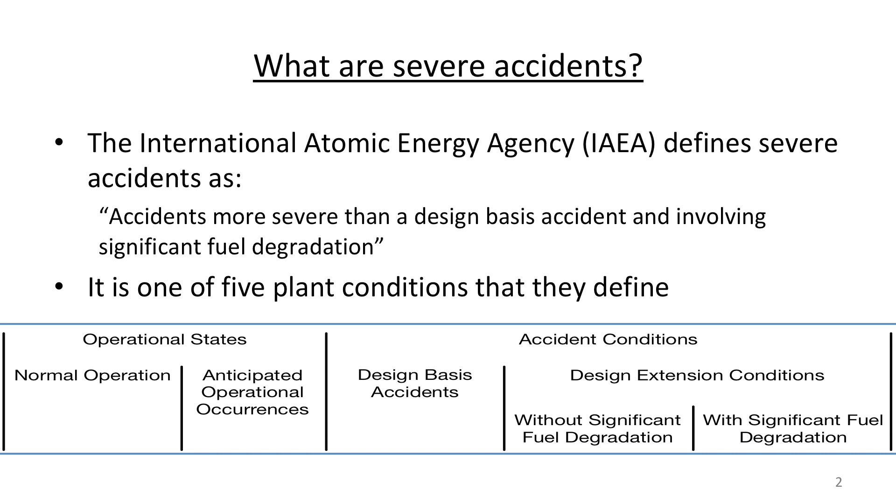After I retired from IAEA in 2013, I began to put some effort into this just for my own amusement. But on my first trip back to Vienna, a colleague asked for a summary of severe accidents for their nuclear knowledge management program. I liked the idea, but now I had to take it more seriously. Later, IAEA asked me to develop video presentations about some of the events. So far, I've made videos for TMI, Chernobyl, Fukushima-Daiichi, and HTRE-3. I spoke about this work at an ANS meeting in 2015.

Joe Naser from EPRI saw that talk and asked me to write a report on lessons learned for instrumentation, control, and human system interfaces. From here on out, I'll use the acronyms I&C and HSI. So now I have 3 products: accident summaries and videos for students, and an EPRI report for practicing engineers. At the end of this video, I'll tell you how to get these products.

My first step was to make a list of severe accidents. I took account of earlier work and then went looking on the internet and in libraries for other events and accident reports. The internet has some crazy stuff, but nothing made it on this list unless I found a credible source that acknowledged significant fuel damage was involved. In most cases, I was able to obtain accident reports or secondary documents based upon the original reports.

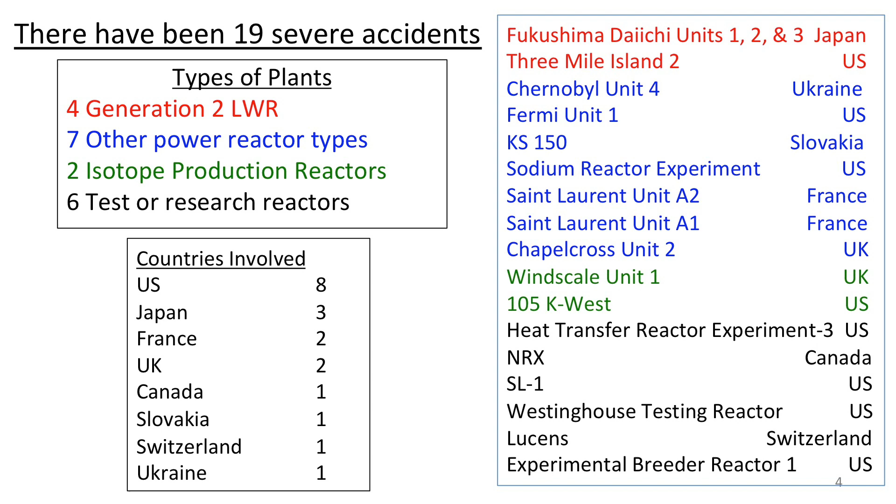Currently, the conventional wisdom is that the frequency of severe accidents should be about 10 to the minus 7 per reactor year. But if we consider only Gen 2 LWRs and decide that Fukushima-Daiichi was 1 event, not 3, the frequency of severe accidents through 2017 is slightly less than 10 to the minus 4 per reactor year. This is a much higher number than most people believe. I conclude from this that we should expect further severe accidents, and it will be some time before severe accident frequency will be as low as 10 to the minus 7 per reactor year.

A cursory look at the loss of hulls from both aircraft and large cargo ships indicates that the frequency of those events may also be around 10 to the minus 4 per hull year. These industries have been around a lot longer than nuclear power. We've had cargo ships for a few thousand years. Could it be that 10 to the minus 4 per unit year is some kind of lower limit for severe accidents in complex systems? That would be a great question to investigate.

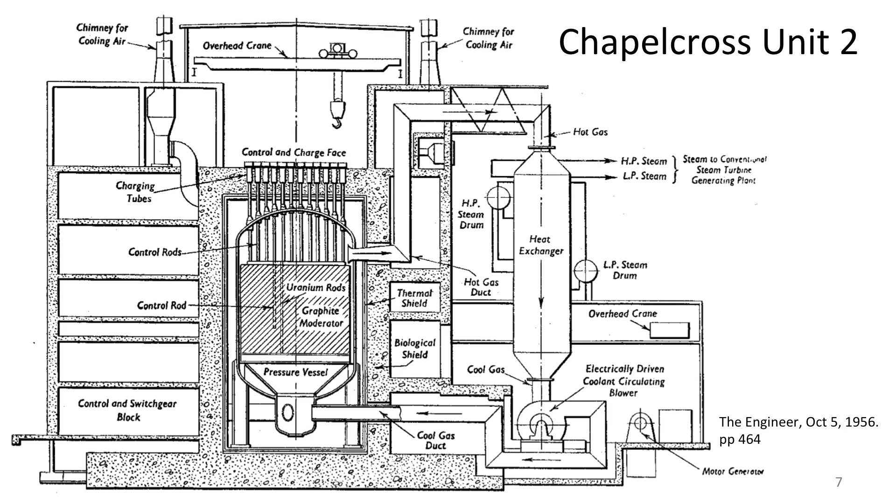Chapelcross 2 was one of 8 similar gas-cooled reactors that used natural uranium fuel assemblies of the Magnox type. Calder Hall 1, the first reactor in this series, was the first nuclear power plant to generate industrial quantities of electricity in 1956. Plants in this series continued in service until 2004. In the early days, these plants had the dual role of producing plutonium and electricity. A little bit of background will help you understand the event.

Fuel assemblies were loaded and unloaded through the tubes shown on the left. The tubes passed through the reactor vessel head, and most of these tubes serviced 16 fuel channels, so a fuel assembly had to be manipulated a bit to get it into the correct fuel channel. The fuel channels shown on the right were columns of graphite bricks. In Chapelcross 2, graphite sleeves were inserted into the channels to isolate the graphite bricks from the reactor coolant flow so that the graphite bricks would operate at a higher temperature, high enough to prevent an accumulation of Wigner energy. These sleeves sometimes became dislodged or broke during removal or insertion of fuel assemblies. It wasn't possible to detect such damage during fuel load.

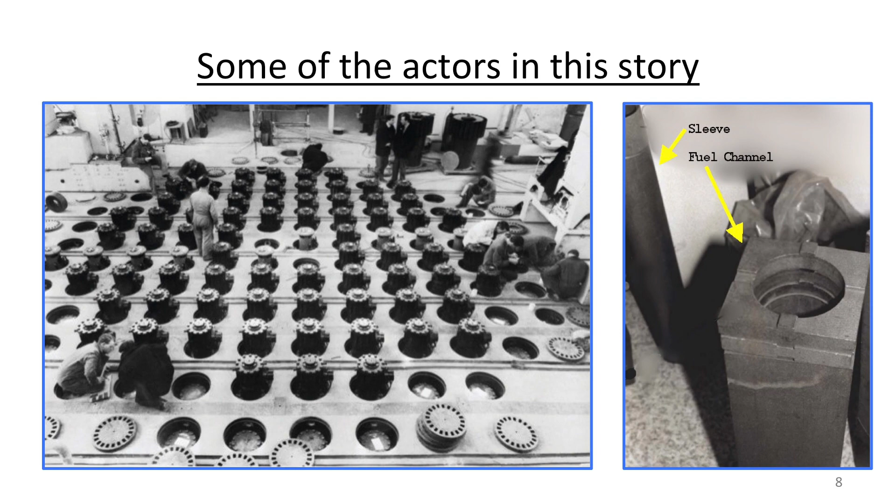Fuel failure was detected by a sampling system that monitored each group of 16 fuel channels. This picture shows some of the sample tubes. Gas from the tubes was sampled sequentially and sent to remote radiation detectors. Selection, transport, sampling, and measurement delays meant that for each group of 16 channels, fission product measurements could only be updated no faster than every 90 seconds.

In 1964, experimental fuel assemblies were installed in several channels. In one case, part of the graphite sleeve was damaged either before or during loading of the experimental fuel. The broken parts fell into the coolant flow path, restricting coolant flow, but during plant operations, there was still enough flow to cool the fuel. The affected channel would have run hot, but the damaged channel was one that didn't have fuel channel outlet temperature sensors, so operators were blind to the problem. 3 years later, fuel elements of a new design replaced most of the fuel, but the fuel in the damaged channel was left in the reactor.

Engineers knew that the new fuel would increase the reactor coolant temperature by about 100 degrees C, but this was still 200 degrees C below the experimental fuel's design temperature. When the reactor was brought up to above 200 megawatt thermal, the coolant flow in the damaged channel was no longer sufficient to cool the fuel assemblies, and fuel began to melt. Fuel failure was detected by the fission product monitoring system, but system response time and a procedural requirement to independently confirm the problem before scramming the plant delayed the reactor trip by 1 or 2 minutes. In that time, 6 fuel elements melted.

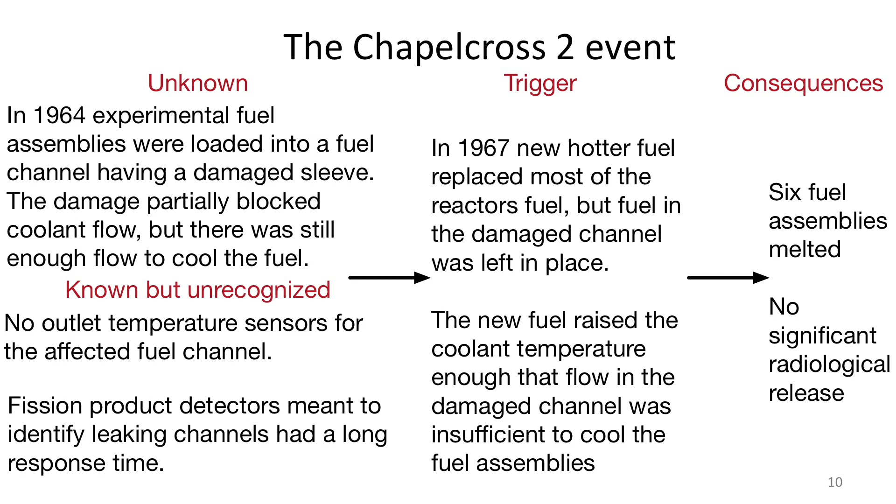The event was initiated by isolation of a condenser polisher caused by a poor maintenance procedure. In Unit 1, an isolated polisher would have been automatically bypassed so as not to cause a reactor trip. Unit 2 didn't have this feature, so a turbine trip and a reactor trip occurred. Safety systems worked as expected and started high-pressure safety injection.

When it came time for the operators to take action, a design error caused the control room indicator to show that the stuck-open PORV was closed. A lack of information about similar events, a desire to avoid a solid reactor coolant system, and poor procedures supported the operators' belief that they were responding to a normal reactor trip. They reduced the reactor coolant makeup rate as required by the procedure for a normal trip, when in fact they were confronting a loss of coolant.

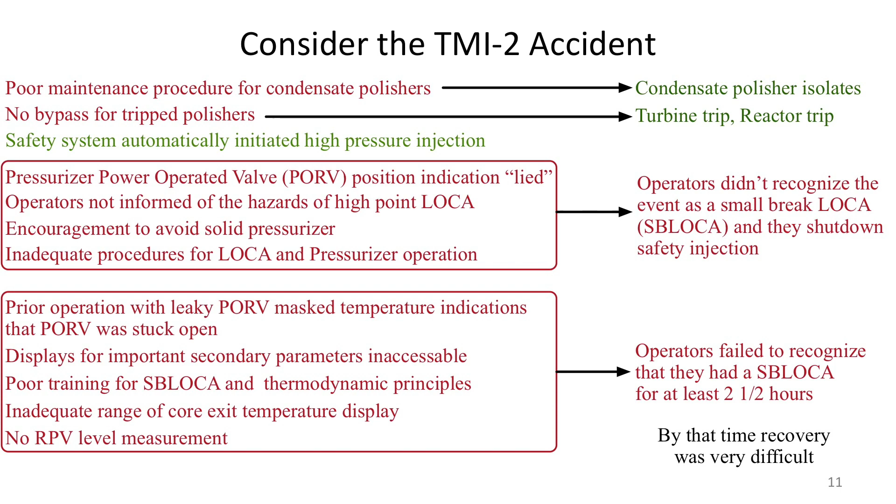Removing almost any one of the red things above would have prevented the accident. Note that most all of the equipment involved worked as designed, and where failures occurred, the equipment was operated outside of its design envelope. This was typical of all the events. The severe accidents were generally not caused by random failures of equipment. We pay great attention to preventing such failures and designing so that failures can be tolerated. This has most certainly limited the frequency of design basis accidents.

The issues leading to severe accidents can be attributed to unrecognized hazards, like the failure to recognize that a high point LOCA behaved differently than a design basis LOCA for TMI. Plant design issues like the addition of fragile fuel assembly sleeves at Chapelcross. I&C design issues like the PORV position indication, showing the demanded position of the valve, not the actual position of the PORV at TMI. Operating procedure issues like the instruction to delay reactor trip on high fission product activity until confirmatory information was available at Chapelcross, or maintenance issues like the poor condensate polisher procedure at TMI-2.

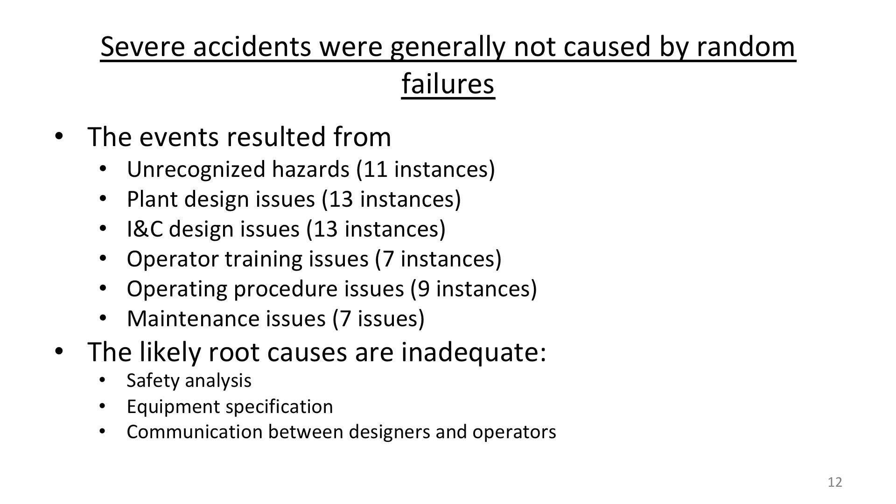In retrospect, it's hard to identify the root causes of these issues, but the usual suspects are inadequate safety analysis, incorrect equipment specification, or inadequate information given to those who prepare training and procedures. These were subtle issues that became important only when an unexpected set of operating conditions were encountered. Always more than one issue was needed to cause a severe accident. Severe accidents always involved bypass of multiple independent layers of defense in depth.

You may be familiar with defense in depth as a series of fission product barriers: fuel pellets, fuel clad, reactor coolant system, containment, and low population zones. But there's a system-level defense in depth concept too that is described by the International Nuclear Safety Advisory Group, or INSAG. INSAG is a committee of highly experienced graybeards who advise the IAEA on safety issues. INSAG describes defense in depth as a series of systems, each independent from the other, and each backing up the preceding system. Rows 3, 4, and 5 of this table describe the levels of defense in depth in the INSAG model.

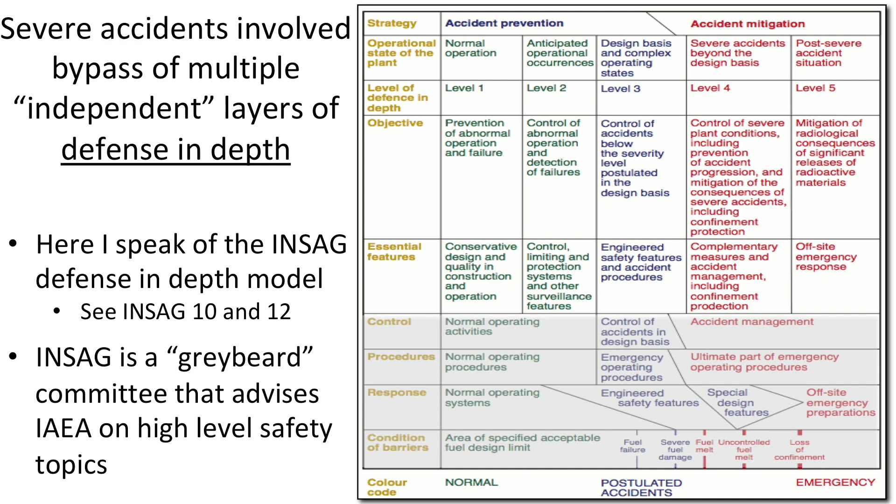Reading left to right, the layers are: 1. Prevent abnormal operation and failure through conservative design and quality in construction and operation. 2. Control anticipated operational occurrences using protection systems and other surveillance features. 3. Control accidents within design basis allowances through engineered safety features and accident procedures. 4. Control severe accident plant conditions through complementary measures and severe accident management guidelines, or SAMGs. 5. Mitigate radiological consequences of release during severe accidents through off-site response measures such as sheltering in place or evacuation. Each of these layers will, if successful, protect the public. I'm sure you can't read the table very well, but it's worth a look sometime.

To help you understand the basis of my claim, I'll give you the Twitter version of a few events. As a result of inadequate natural phenomena design bases at Fukushima-Daiichi, a large tsunami disabled nearly all plant systems. The lack of severe accident management procedures and associated practice hampered operators' attempts to restore core cooling and defend containment integrity. Eventually, fuel melt and partial containment failure occurred in all three plants.

Operators at Chernobyl were unaware of several design hazards, and ignoring allowed operating limits, the operators brought the plant to a condition where high coolant void fraction initiated a power increase. Recognizing the problem, the operators scrammed the reactor, unaware that in the existing plant condition, the scram would insert reactivity, and rod insertion initiated a reactivity accident. The St. Laurent A2 design didn't include loose parts monitoring. An in-vessel component came loose and eventually blocked some fuel assemblies, initiating fuel melt.

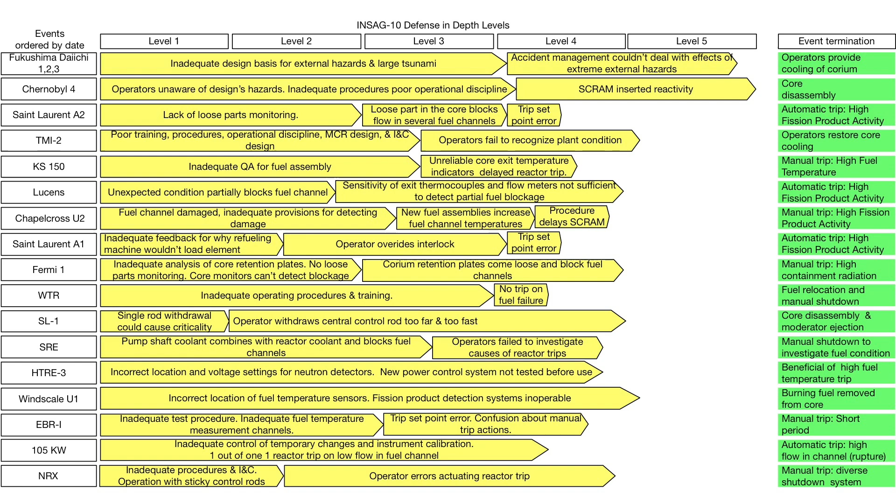Two sets of fission product detectors couldn't detect the situation because in one system, core outlet gas was not aligned to pass by the detectors, and in the other system, thermal expansion of the structures intended to scan detectors behind the fuel channel outlets bound up because of very high temperatures in the reactor outlet plenum. Considerable fuel caught fire. The unrecognized dependencies are common cause failures, but they are not common cause failures of equipment. They are common cause failures of the mind. It should be a reminder to always check your intellectual blind spots.

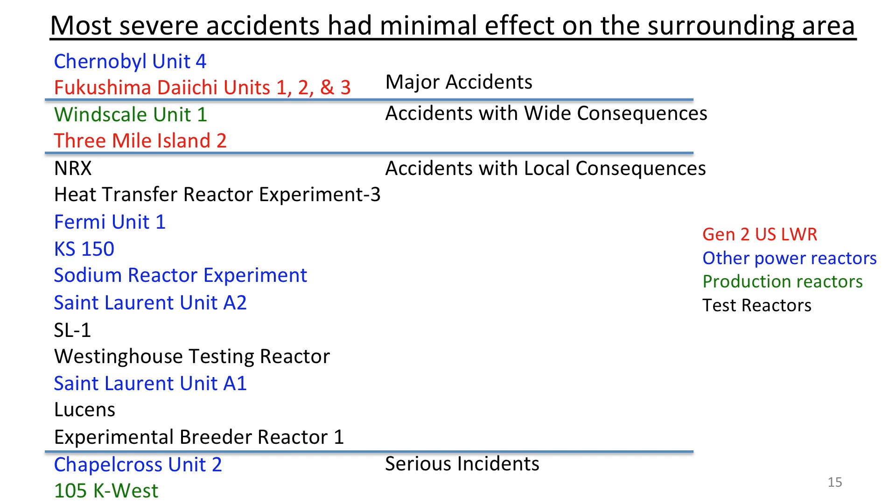Most severe accidents had minimal effect on the surrounding area. Accidents with local consequences mainly affected only the plant site. The list above is sorted more or less in the order of the degree of fuel melt. 11 of the plants in the lower two categories were eventually returned to service. It's interesting that the first 4 accidents were the worst. One possible reason is that most of the other accidents involved low-power reactors. But this doesn't explain everything because the 2 St. Laurent units and 105K West operated at thermal power levels that were about 80% of the Fukushima-Daiichi units.

Severe accidents haven't caused the expected levels of public radiation exposure. At Windscale and Fukushima, the mitigative actions kept public exposure within acceptable limits. The actions taken at Chernobyl were not as successful, but still, radiological consequences to the public were lower than expected.

There's no evidence that any member of the public has suffered deterministic effects of radiation exposure from a reactor accident, and only at Chernobyl is there evidence of the public suffering stochastic effects. The United Nations Scientific Committee on the Effects of Atomic Radiation concluded that the Chernobyl event resulted in about 6,000 additional thyroid cancers in Ukraine and Belarus, and that these 6,000 cancers caused approximately 15 fatalities. This is not good, but it is significantly below what was expected from such a horrendous event.

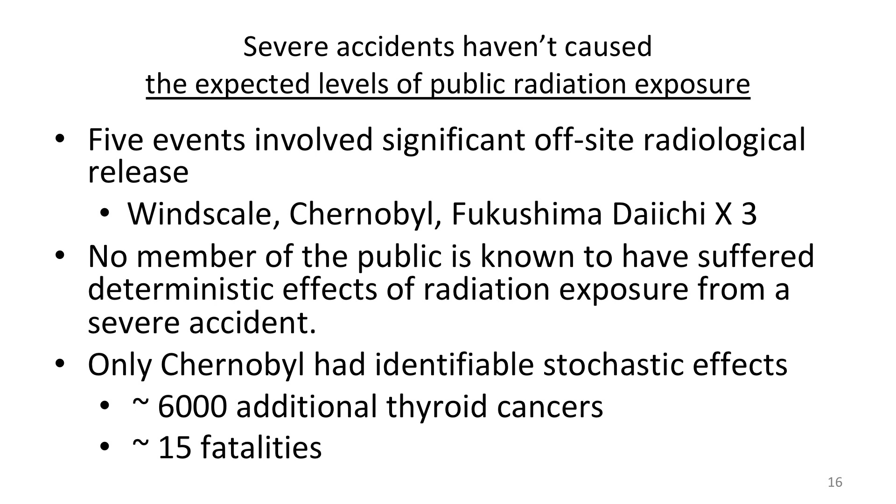For years, our prime directive has been to spare our neighbors from harmful effects of radiation exposure. With the exception of Chernobyl, we've succeeded. But radiation exposure wasn't the only serious consequence of the accidents at Fukushima-Daiichi and Chernobyl. More than 500,000 people were displaced from their homes for a substantial period of time. At the end of 2017, about 55,000 evacuees from the Fukushima-Daiichi accident were still living away from home.

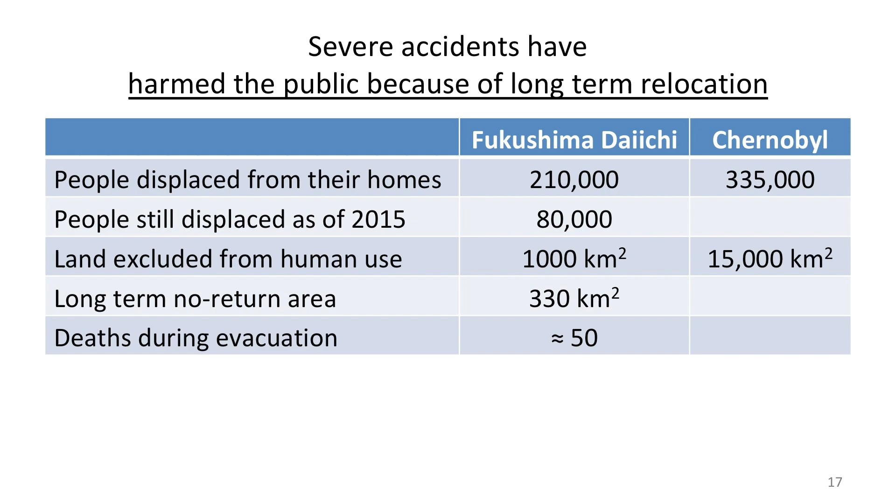I found no such data for Ukraine, Belarus, and Russia, but it is known that some Chernobyl evacuees decided on their own to move back into the no-go zone. Belarus has just recently started opening up some areas for resettlement. About 50 people died during the evacuation at Fukushima-Daiichi. The deaths that I know about were hospital patients who could not be immediately moved. They were left behind with a skeleton staff with the intent that they would be evacuated a few days later. It took longer than expected to move them to a location where they could be properly cared for.

Depression and post-traumatic stress syndrome were common amongst the affected and even the unaffected at both sites. A 2013 survey of Fukushima evacuees determined that most were still living in evacuation shelters. Nearly half considered themselves socially disabled due to traumatic symptoms, and nearly all thought that they or their offspring would suffer health effects from radiation exposure, when the real number is probably zero. A 2016 study of Fukushima-Daiichi determined that mortality rates amongst the elderly in the area increased by a factor of 2 to 3 during the 4 months after the accident.

It's clear to me our prime directive to not irradiate our neighbors is insufficient. The prime directive must also include never making our neighbors move from their homes.

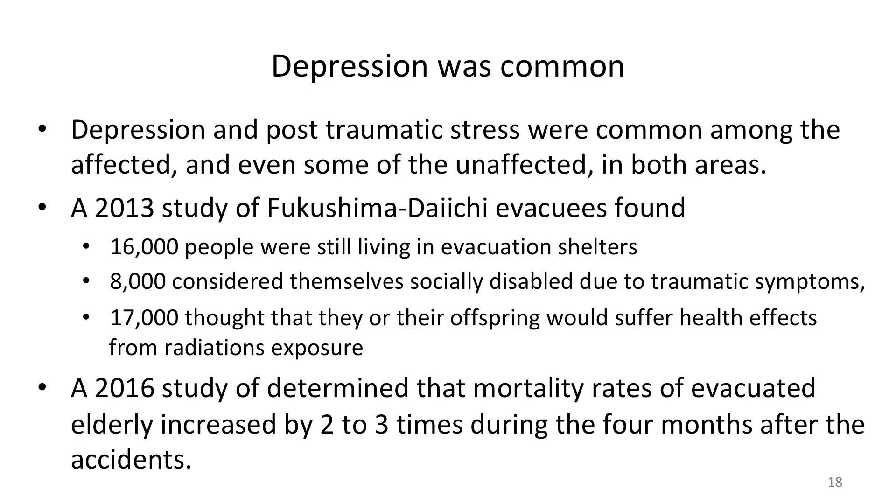From the EPRI work, I found that I&C or HSI issues contributed to all but one event. I concluded that the I&C and HSI contributions could be grouped into 5 categories. I&C functions that were needed to deal with the accident didn't exist. Existing I&C functions that would have helped to deal with the accident were not in service, usually for reasons other than failure. Existing I&C functions that would have helped deal with the accident didn't have the required performance characteristics. The operators could not see or could not understand displays that would have allowed them to better deal with the accident, or some life cycle activity, such as incorrect calibration or improper assembly of a fuel element, contributed to the accident.

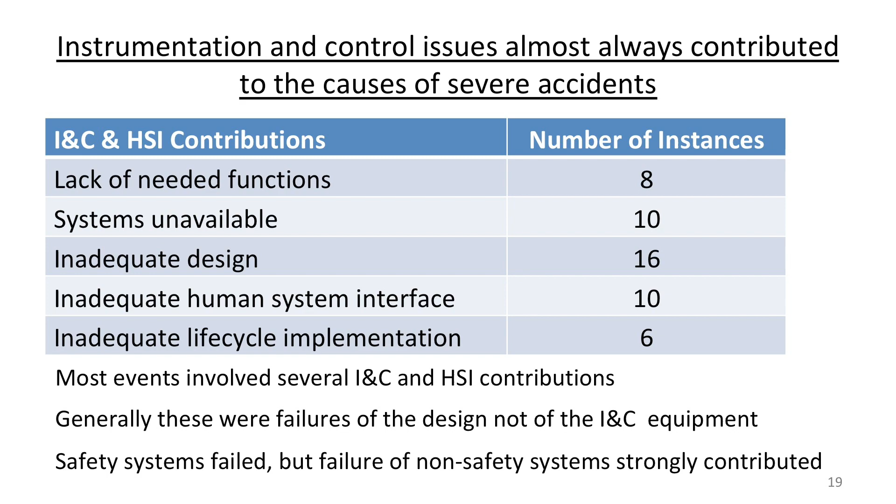Note that the large number of I&C and HSI contributions reflect the fact that multiple I&C contributions were involved in most of the accidents. So to recap, while many of the events considered are old, I think their lessons are still relevant today. Today, a generous estimate is that the frequency of severe accidents is about 10 to the minus 4 per reactor year. We should expect future events. Severe accidents appear to be black swans. Unknowns led to inadequate design, training, or procedures.

Severe accidents were generally not caused by equipment failures, but by the fact that plant design, procedures, or training did not account for the unknowns. Severe accidents involve bypass of multiple levels of defense in depth. Such bypasses occur when discounted or unknown hazards introduce unexpected dependencies between levels of defense in depth. And we've done a good job of protecting our neighbors from radiation exposure. But we must do better to avoid moving them away from their homes when such accidents occur.

This work has been very interesting for me, and I don't think I've fully wrung out yet all that can be learned. It impressed upon me the wild ways that things can go wrong. Most such accidents are extremely complex, and the causes cut across multiple disciplines. We'll probably never be able to fully eliminate the kinds of errors involved, but the study is a clear reminder that if you work on things nuclear, you must avoid falling into the somebody else's problem field. The nuclear power business involves many disciplines, but no matter what our background, we are all in the end plant people.